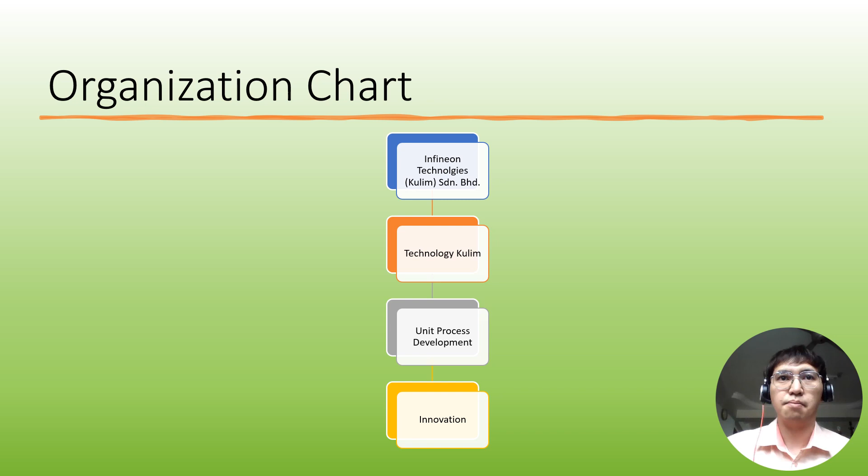During my internship, I was assigned to the innovation team, which is under the Unit Process Development Department. The Unit Process Development Department is under the Technology Kulim team inside Infineon Technologies. During my internship, I got two jobs to do. First is the diluted backgrinding wastewater filtration, and the second one is the silicon modification. Next, I'll explain my tasks one by one.

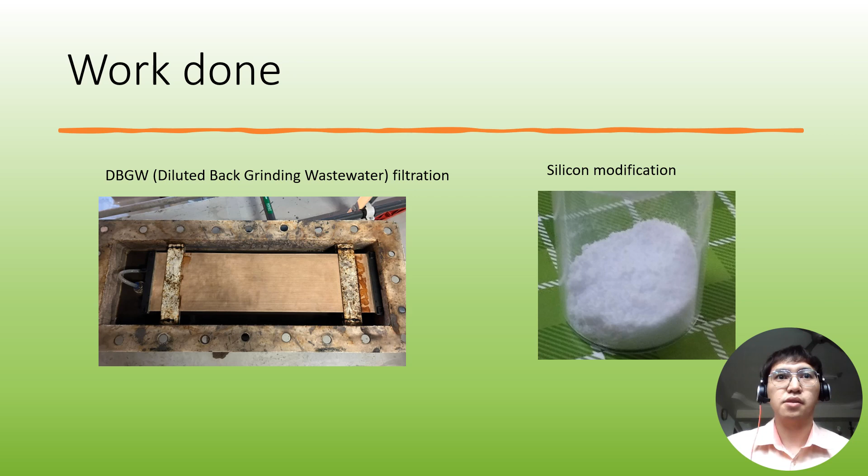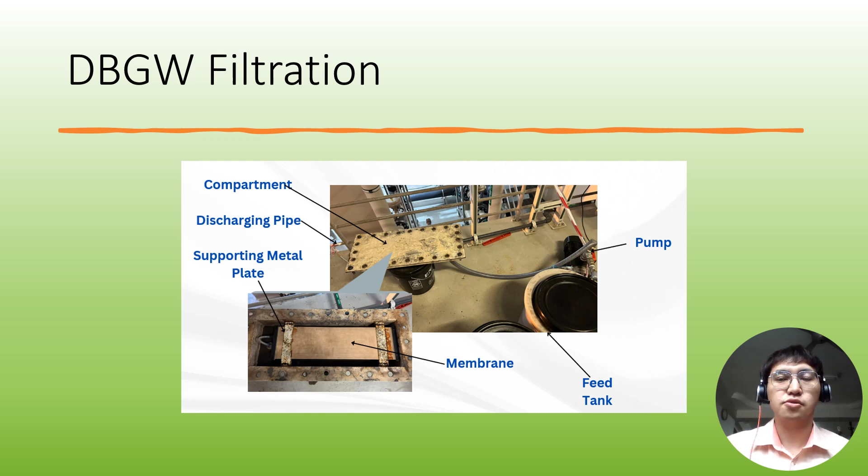For the diluted backgrinding wastewater filtration, I have to do filtration using the diluted backgrinding wastewater, DBGW, as my source to filter out the silicon from the wastewater. This is the compartment I use to do the filtration. This is the theory of the filtration, where we use a membrane. The membrane we use is a ceramic membrane, and it acts as a barrier to restrict the transport of the silicon particles. Thus, we can recover the silicon from the diluted backgrinding wastewater and use it for other usage to gain money for the company.

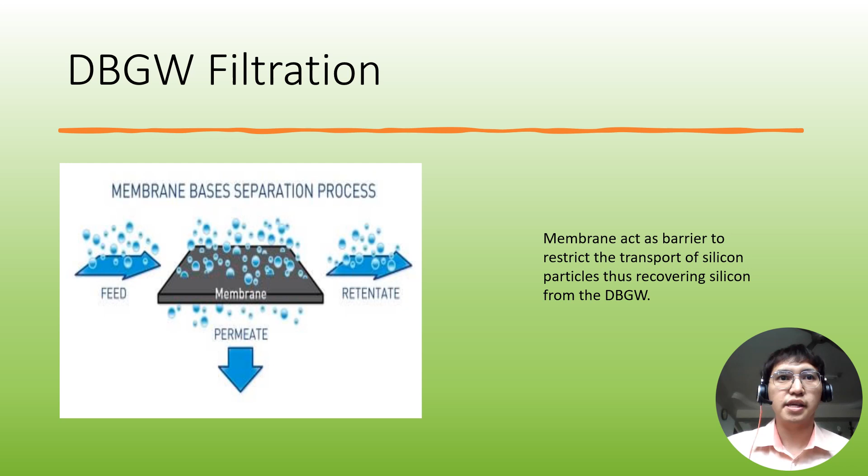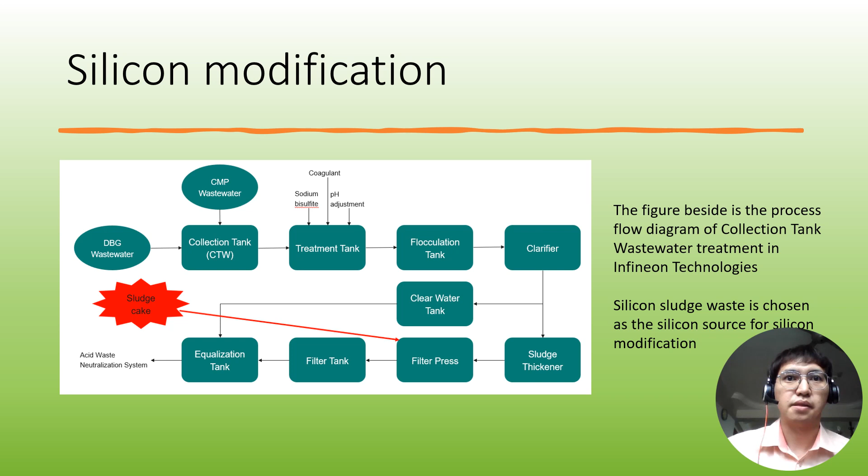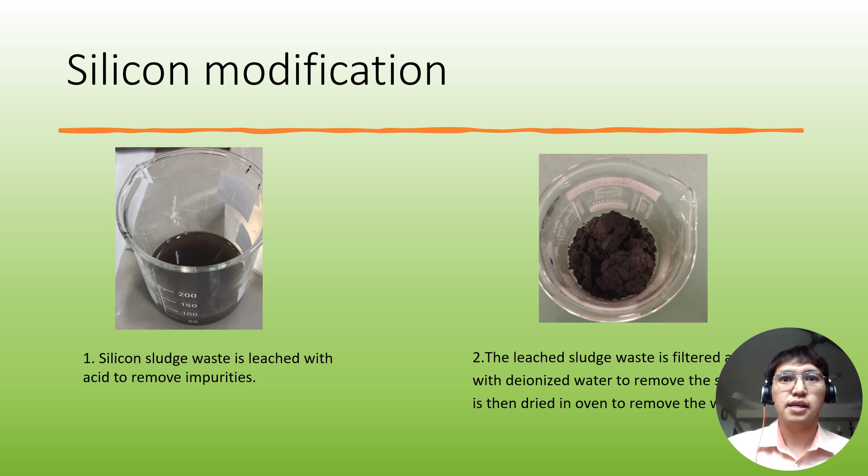For my silicon modification, there are 5 processes. First, the silicon sludge waste is leached with acid to remove the impurities inside, mainly aluminium. Then the leached sludge waste is filtered with deionized water to remove the impurities, and then dried in the oven to remove the water inside. After that, the dried sludge waste is reacted with sodium hydroxide on the hot plate stirrer. The silica nanoparticles precursor, sodium silicate, a colorless solution, is formed, and then filtered to remove the impurities inside.

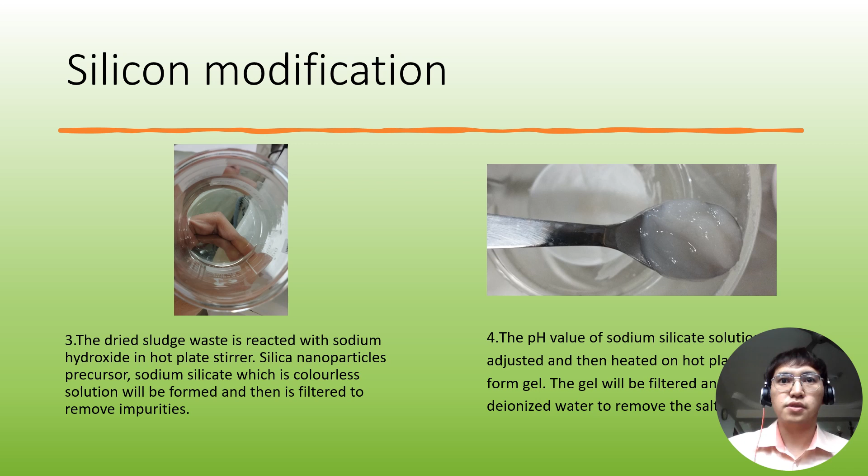Then the pH value of the sodium silicate solution is adjusted and heated on the hot plate stirrer to form gel. The gel, the white color things, is filtered and rinsed with deionized water to remove the salt on it. The last step is heating the gel in the oven to form the silica nanoparticles powder, which is then calcined in the furnace. The silica nanoparticles are then sent for characterization to study their morphology and particle size. However, the characterization process is really time consuming and I was unable to wait for the result during the internship program.

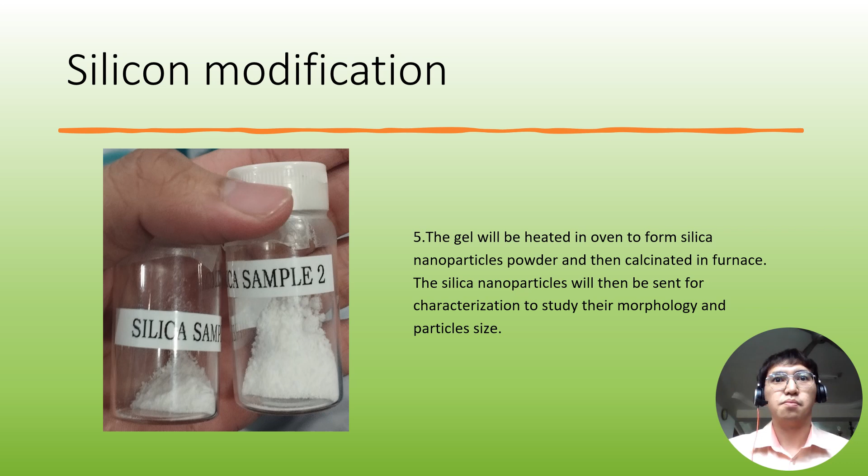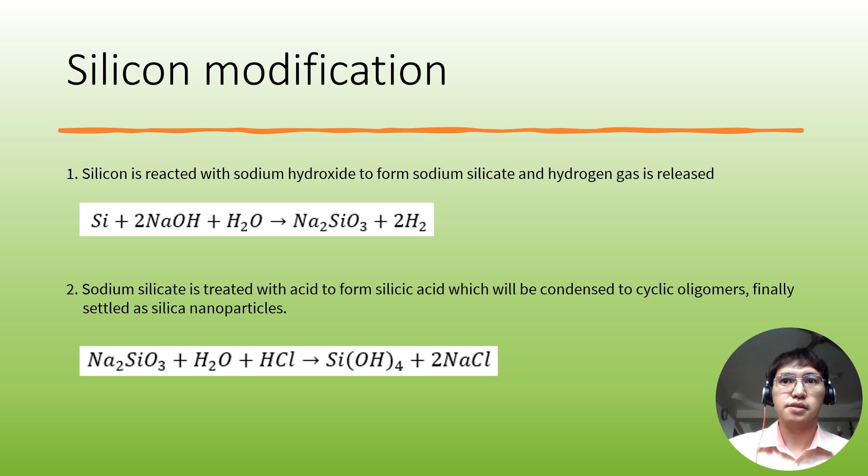For the silicon modification, the silicon is reacted with sodium hydroxide to form sodium silicate, and hydrogen gas is released during the process. Next, the sodium silicate is treated with acid to form silicic acid, which condenses to cyclic oligomers and finally settles as silica nanoparticles. That's all from me on my internship work.